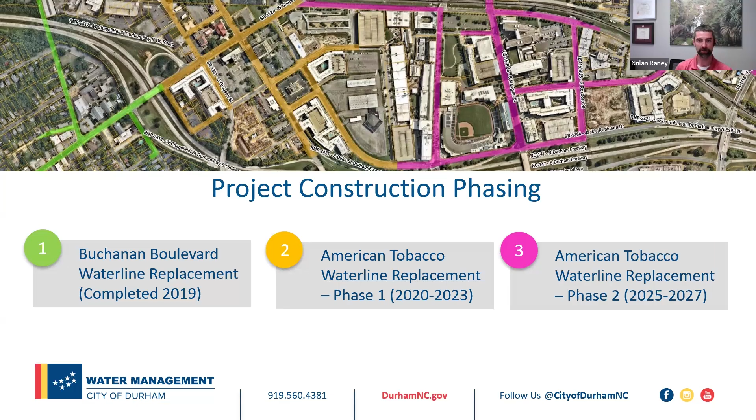The second project, called American Tobacco Phase 1, was the yellow project area, generally on the west side of the American Tobacco campus. And the third project, which we're talking about tonight, is called American Tobacco Waterline Phase 2. That's the pinkish area on this slide.

This slide shows a little bit more focused picture on just that Phase 2 project area. You'll see generally it includes from the American Tobacco campus going east, including Pettigrew, Blackwell, some parts of Morehead, Jackie Robinson, Mangum, Roxboro, Dillard, and Ramseur streets as several of the corridors where the project work will take place.

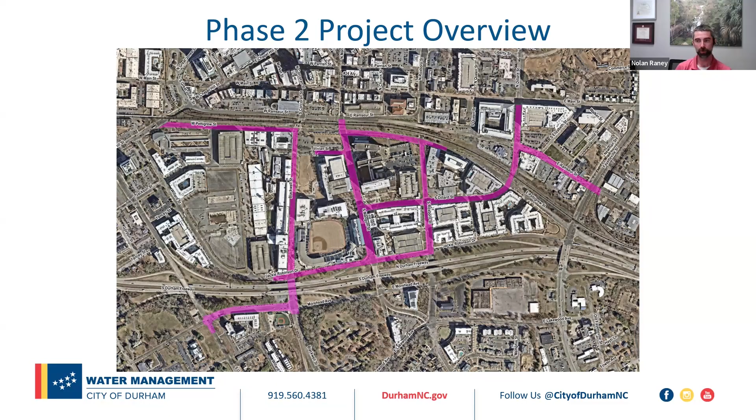A summary of the Phase 2 project: the project will replace about 11,500 linear feet of existing 1920s and 1930s era water lines. Many of these water lines were installed nearly 100 years ago, are cast iron water lines, and have served a useful life and are in need of replacement.

As we replace those water lines, we'll also be upgrading and reconnecting existing water services. There are also a number of fire lines, fire hydrants, and other associated services in addition to water services.

We'll also be installing about 5,000 linear feet of 36-inch transmission main. That's a large diameter pipe that carries a lot of water along the city's corridor. This will replace an existing 24-inch water line that generally runs along the North Carolina Railroad corridor in downtown Durham. This larger diameter new transmission main will allow for that old water line to be abandoned.

On the sanitary sewer side, we'll also be rehabilitating or replacing select sanitary sewer lines in the project area. And then finally, as all of this work is completed, we'll be completing pavement repairs in those construction areas where pavement has been impacted.

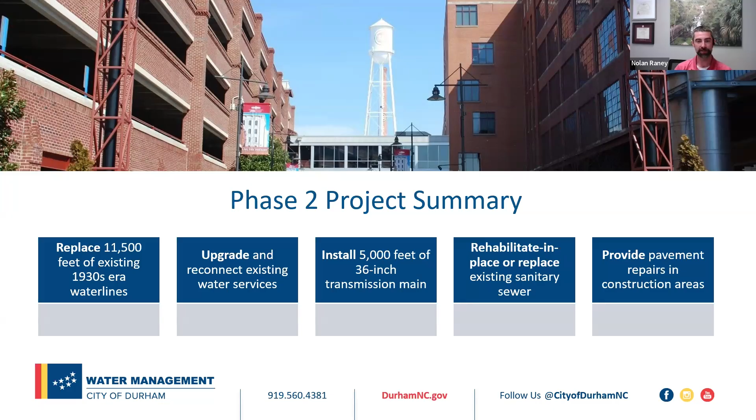For the timeline, construction is anticipated to begin here in September of 2025. The overall duration of the project is anticipated to take around 18 months, which will put construction completion in the spring of 2027.

So why is this project needed? I touched on this a little bit on the previous slide, but primarily, it's to replace aging infrastructure. Many of these water lines have had a useful life of nearly 100 years, and replacing them will provide better service reliability, as noted on bullet 2 on the slide.

The photo on the slide is a picture of an existing water line in an adjacent project area that was replaced. You can see that over time, it's natural for material to build up in that pipe, and replacing these water lines will provide higher reliability of service to users in this project area.

We also will improve the fire flow ability to serve this project area. As you'd expect, the fire flow demands required here in 2025 are much different than they were back in 1930. So these new water lines will be sized appropriately to meet the fire flow demands of today, and into the future for this area.

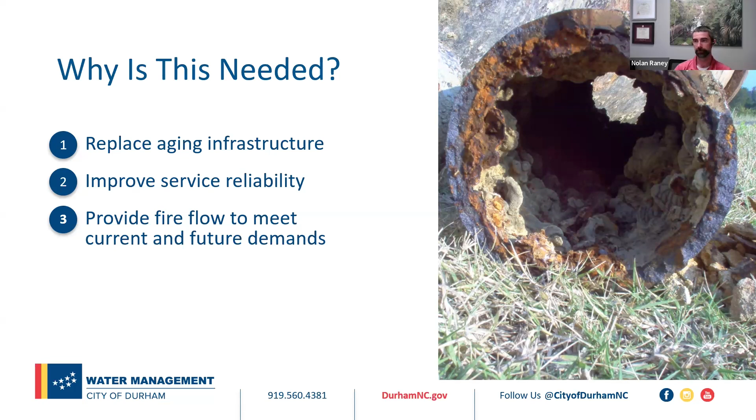Going back a little bit to the construction phasing and timeline, this picture shows the general sequence and anticipated areas when work will take place across this project area. Big picture, the work is anticipated to begin on the west side of the project area and progress going east. The first phase of work, generally from now through January of '26, is the purple highlighted areas.

As we move further east, the green highlighted areas will see work in the spring and summer of 2026, followed by work on the eastern side of the project area in the red and pink areas in late '26 into early 2027. Of course, all of this work can be impacted by unknown conflicts, weather, or other factors that may come into play throughout this project area.

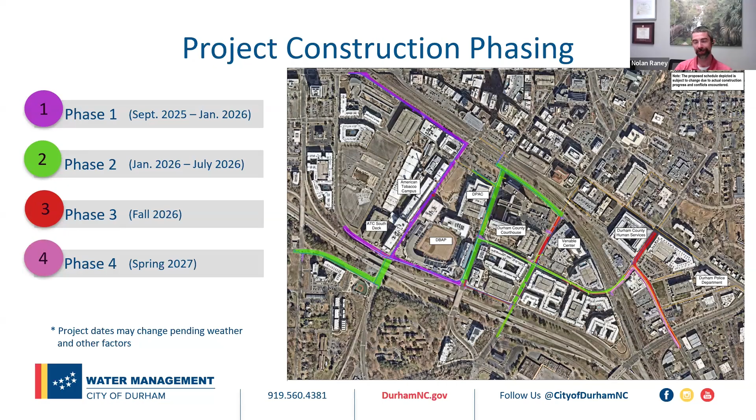So we'll be updating a map like this throughout the project to keep everyone up to date on the schedule of the work.

Zooming in a bit more on that first section of work that will take place in the fall of 2025: the green areas are where we'll see construction first, generally along Chapel Hill Street in the western end of Pettigrew Street, and also along Willard Street where it transitions to Jackie Robinson Drive near the ATC South deck. Those will be our first areas, as construction continues going east towards Blackwell Street.

Once again, these are our anticipated timelines, but we'll continue updating this map and other outreach materials as the real-time schedules are determined as construction progresses.

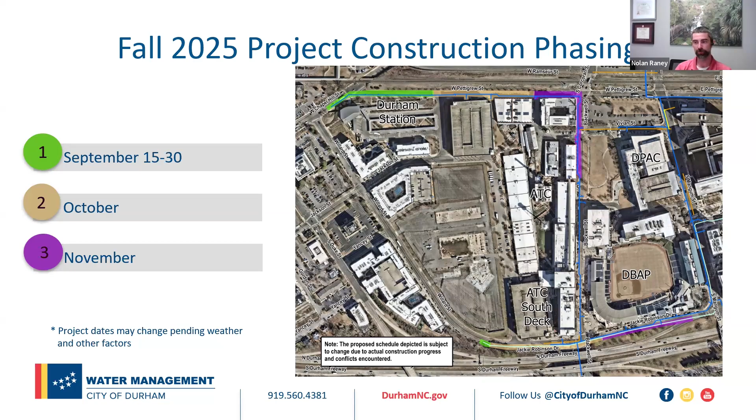So what will construction look like? Trucks and equipment will be bringing materials to and from the work site on a daily basis, multiple times per day, to bring materials to the site for installation. Many of those materials will be staged off-site and then brought to the site for installation.

When a water line is installed, you may see multiple passes or different periods of work on that water line installation. First, a water line will be installed along a corridor, and you'll see that work taking place. There may be what appears to be a pause in work as that water line is then tested and approved and made ready to place into service.

Once it's approved and has passed all testing, you'll see a bit more activity as crews come back to reconnect water services from the new main to the existing water services. You may wonder why that's taking place — that's a little bit of the background as to how those water service reconnections happen.

The work in this area will generally take place within the right of way, with some minor easement locations. Many of our water services are located near the property line, so you'll see work extending up to those meters.

When a water line is installed, a temporary asphalt patch will be placed back to patch the road and get it back into active service. There will later be a more robust asphalt restoration that takes place over a larger segment once that section of water line is installed.

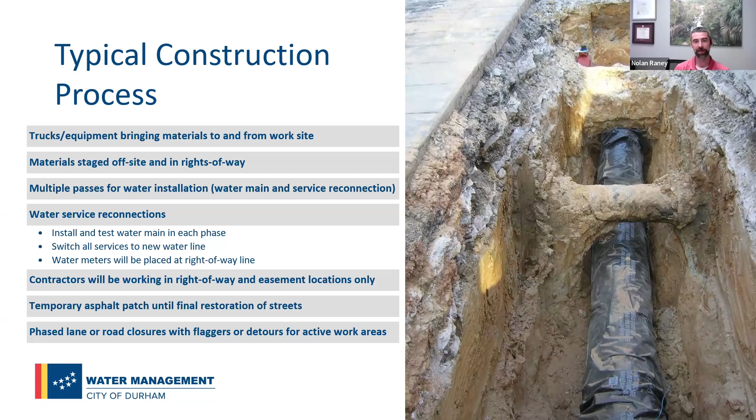In the active work areas, we may see phased lane or road closures with flaggers or detour routes to help traffic either access areas or follow signs indicating detour routes that may be used.

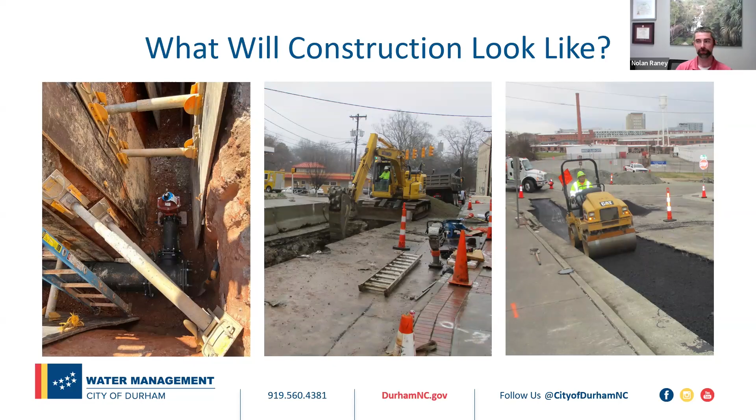These are some representative pictures of construction in adjacent areas of Durham. The picture on the far left is a water line with a valve buried in the ground. We don't typically ask the public to see this, but this is what you may see if you were to look down into the hole of a construction trench, and that's what's being installed. The middle picture shows an excavator either installing the utility or backfilling a trench. On the far right is asphalt being installed and compacted in place, which is part of the restoration activity to return a road to service following a waterline installation.

Safety is paramount for both workers and the general public throughout any construction project, and this one in particular. We understand there is a lot of pedestrian activity and vehicles in and around this project area. We ask that the public stay behind work zone barriers to make sure they're in a safe environment, and the contractor will be setting up barriers to denote where pedestrians may and may not be. A traffic control plan has been reviewed and approved by both NCDOT and the city transportation department, which will be implemented as work occurs. There will be varying road and lane closures that restrict traffic to active construction areas.

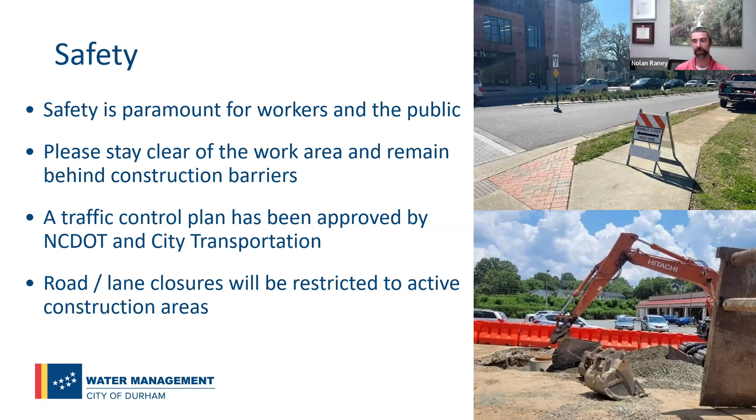Talking more about traffic and pedestrian impacts: for traffic, we anticipate parking, lane, and some limited full road closures to accommodate this work. Where that happens, there will be traffic control with flaggers or detours to maintain traffic in the project area. Maintaining access to businesses is still critical, so we'll make sure access is maintained throughout all portions of the project.

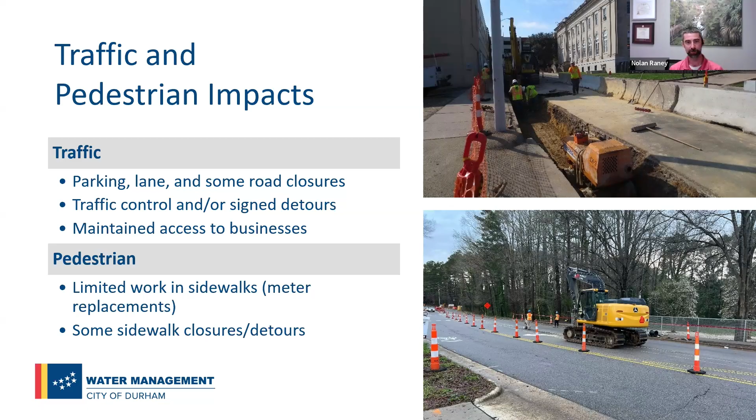Pedestrian impacts should be fairly limited, since most of our installations are within existing roadways. As mentioned before, some meters are located in sidewalks, along with some fire line connections and fire hydrants, so pedestrian impacts will be primarily limited to those service reconnections and similar work. When that work takes place, we will detour sidewalks to the opposite side of the street to maintain pedestrian traffic.

Our goal for businesses and residences in this area is to maintain access throughout. We certainly want to work with businesses and residences to make sure their businesses and homes can be accessed throughout the entire life of the project.

In terms of traffic, we do have some select night and weekend work that will be required in this project area. We also have some work restrictions for specific events in and around several key areas, including DBAP, DPAC, and the American Tobacco Campus. When there's an event, we have limited construction hours allowed in the immediate vicinity of those facilities.

Noise is always unavoidable with construction, and we will try to minimize that as much as we can. Our typical work hours are 7 a.m. to 7 p.m., so hopefully we can minimize nighttime noise impact. However, nighttime work will be required in some areas.

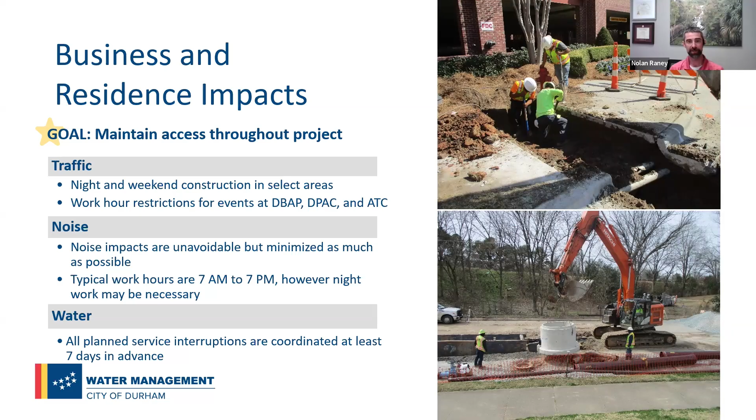In terms of water service interruptions, all planned interruptions will be coordinated with users at least 7 days in advance and scheduled at a time that works for them, especially with businesses in this area, to make sure we can reconnect service with minimal disruptions.

So what can we expect in the coming months? You'll start to see some activity in and around the project area, especially in those first work areas shown on the schedule. There will be a pre-construction video taking place to document all existing conditions of sidewalks, roads, and other features. When we're done with our work, we'll make sure those features are put back to match or be better than their pre-existing condition, anything that we do impact. There will be more notifications sent out to stakeholders via email, door hangers, and other methods as work gets closer to beginning and transitions to new project areas.

You'll see a lot of paint on the ground in different colors, red, green, orange. Those designate existing utilities that are buried, which we'll need to be very careful of when digging so we don't disrupt other utilities. Traffic control and signage will be in place as work begins, where we need to shift traffic or have a traffic detour.

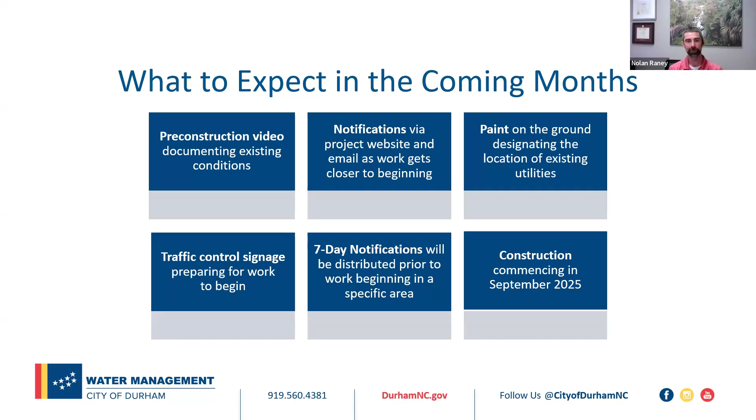Signage will be used to make sure traffic understands where to be. There will also be other notifications, including a 7-day notification both as work begins and when any water service interruption may be scheduled. As mentioned, construction will be commencing here on September 15th, which is when we'll start to see some of those impacts begin.

One other topic that's not solely related to this project, but across the city, are the lead and copper rules. You may have received mailers or information about lead and copper throughout the city or beyond. We'll provide a little bit of background related to this project.

The city owns the water service generally from the water main to the water meter. Those services are all planned to be replaced within our project area as part of this project. As part of this project, we'll be documenting the existing material of that service on the city side, which will be provided to the city for records and for reporting.

On the customer side of the water service, from the water meter to the building or facility, that is the customer-owned part of the water service. As part of this project, we want to document the existing material of this water service for records as well. So we'll be asking property owners for a right of entry agreement to allow us to access your property to determine what that water service material is and document it for our records.

There are also other ways customers can earn or receive a $30 water utility credit for providing information about their customer-side water service material on their own. The website shown on the slide can provide additional information on how to proceed down that path. With very few residences in this project area, this is probably less of a common item here, but it's more broadly used across the city for other residential units.

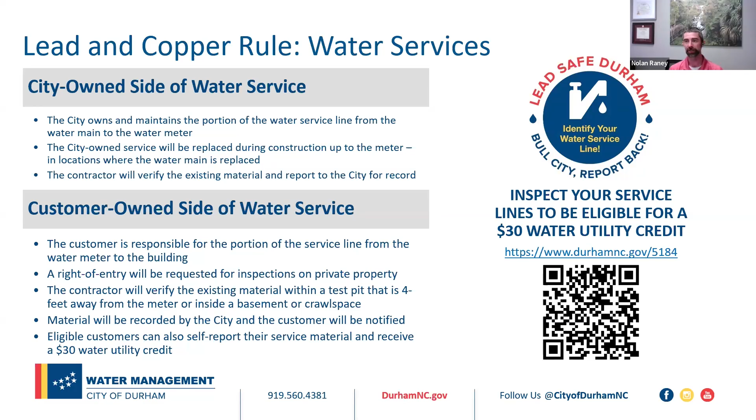So how can you stay informed throughout the life of the project? The city will be disseminating information via their normal social media channels, Facebook, Instagram, YouTube, as well as the project website listed here and available via the QR code on the slide. We'll have regular updates on a weekly basis, if not more, as the project continues.

We'll be sending out weekly schedule update emails, generally every Friday, that will describe the coming work over the next 2 weeks of the project. This will describe the work area, the anticipated roadway impacts, and other key features of that work. By going to the webpage listed, you may sign up to receive that email.

We do encourage you, if you're in the area and interested, to receive that email on a regular basis to be made aware of the work areas. You can also go to the website, where that 2-week look-ahead schedule will also be posted each week. Now for some other contacts in terms of physical people.

We will have a full-time construction observer on site, and the contractor will be available on site on a daily basis, should there be questions if you're on site and need a quick answer in an active work area. There are also project contacts listed on the website, including myself, Wade, and others who can be reached out to if you have any questions about the project.